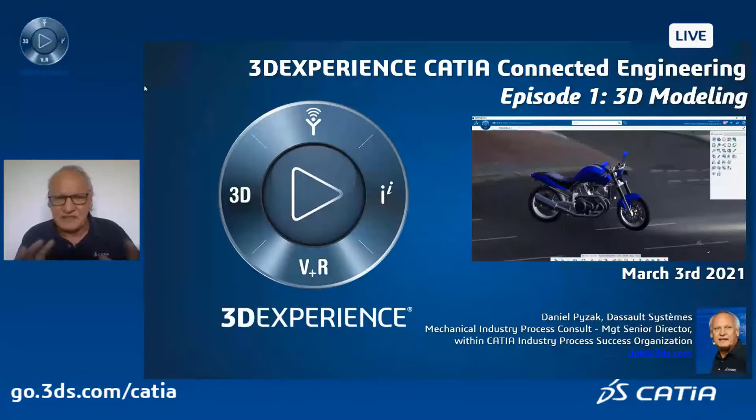And this is episode 1. We will make more episodes in the future, mainly focused on assembly modeling or some other nice capability of 3D Experience CATIA. And I hope you will enjoy that. So it lasts around 30 minutes, not more.

Let's start. So the idea is to show you how, if you were a 3D Experience CATIA user, you have to work. What are the steps to design this particular assembly? It's a braking system, braking caliper system. And at the end, how you can take into account some data that you receive from your supplier or maybe your customer, which are maybe not perfect, and how to clean and to take into account some design changes.

Okay, so it's a little bit of part design for those who are familiar with CATIA, and a little bit of generative shape design for those, again, who are familiar with CATIA. Let's start by designing this assembly.

So very first thing, I am in CATIA assembly design. So you can check here the workbench, the app I am using, and you can see that in 3D Experience CATIA, I can use very, very advanced rendering display, still with a very, very good response time, because this helps you to understand better your design context, okay?

And you can see that I will use, for this particular presentation, almost not at all the spec tree that maybe you are familiar with, what we call the specification tree, where the history of the design is shown. I will not use icons which are spread out all over my screen, because the idea is to keep most of the display for the 3D,

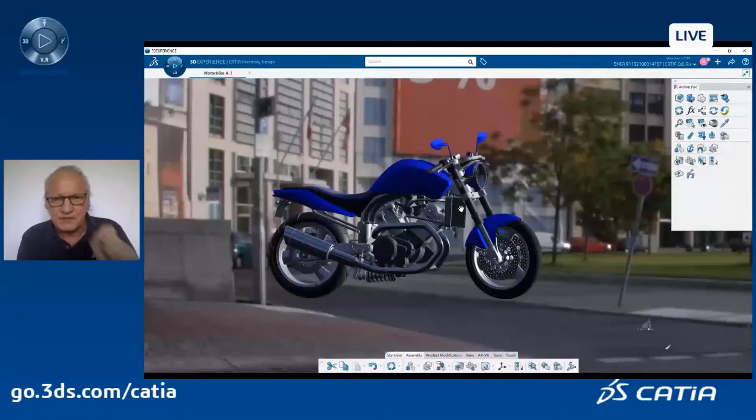And you can gather them in an action pad. They are default action pads, by the way. And you can either dock them, like what is done here. I docked them on the upper right side of my screen, or those action pads can be popped up just where my mouse is located, just by hitting the B key on the keyboard. It's not what I will use. I will use the docking capability of CATIA.

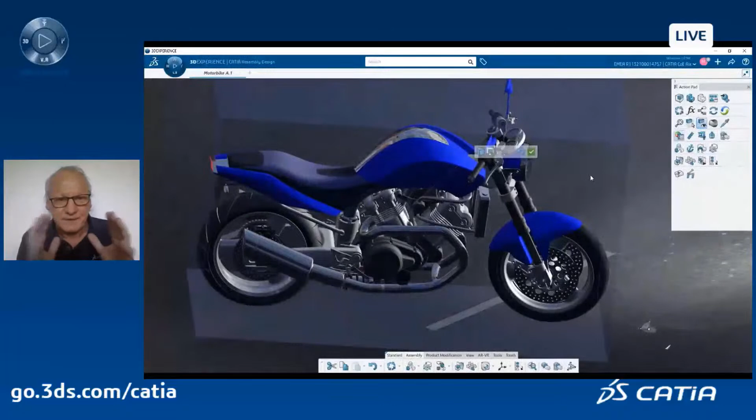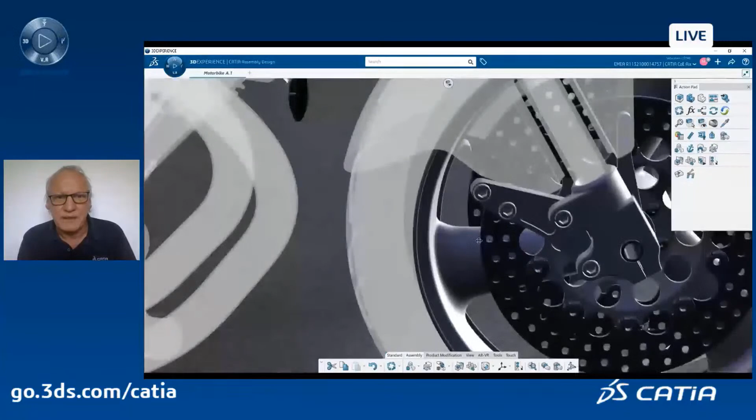Let's start. So this is my motorbike, and I want to work on this particular braking system, the brake caliper. Okay. First thing, I will select visually my context. I will define my working context, and you will see a very nice capability of 3DEXPERIENCE CATIA, which is a display of what I don't need in a ghost way. So what you see in dimmed or transparent white is in fact in ghost mode. But at least I know where I am in my full assembly.

And I can, for example, add a new view in my working environment. The view of this context can be shifted to another screen. You know, most CAD users today mainly use two screens. If you are using 3DEXPERIENCE CATIA, you use the two screens either to display, for example, the assembly and your part, or some menus, because you can also dispatch some menus to other screens. So it's very, very flexible.

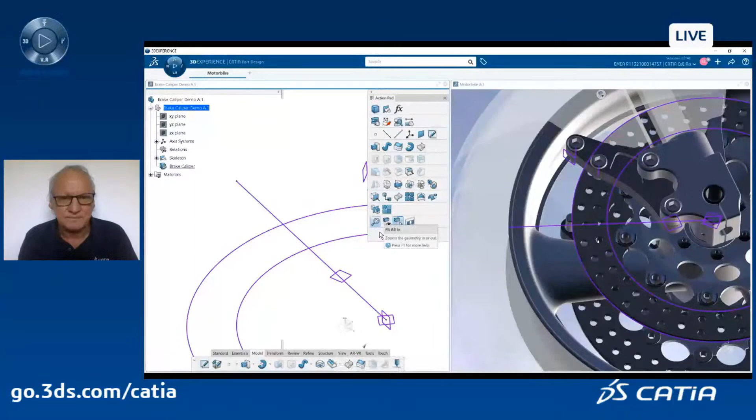So let's see what it does. So here I display my starting point. I start by defining a skeleton, which is a very traditional way of working with CATIA. And of course, I can see the skeleton at the part level, here on the left side of the screen, or at the assembly and context level on the right part of the screen. And there will be a permanent dual display of what I am designing. So let's start the design.

Maybe you did not see that, but I click on a plane, and automatically CATIA prompts me: what do you want to do with the plane? Probably you want to do a sketch. And I say yes. So I don't have to go and click on the sketch icon, which might be somewhere, maybe in my action pad, or maybe not.

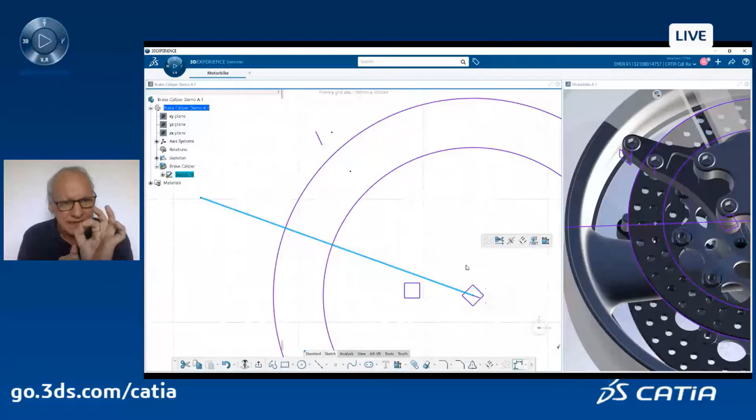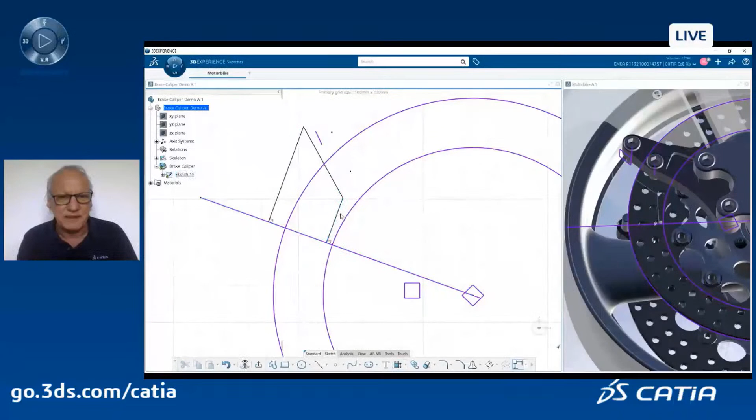You see here, sketch. Now I'm defining my sketch, and all my commands of the sketcher are also popping up in front of me, close to my mouse location and my click, proposing some commands depending on what I clicked. This is what we call the contextual immersive commands. Very nice capability. So I start my sketch. Here I can also use the commands which are in the action bar, on the lower level of the screen.

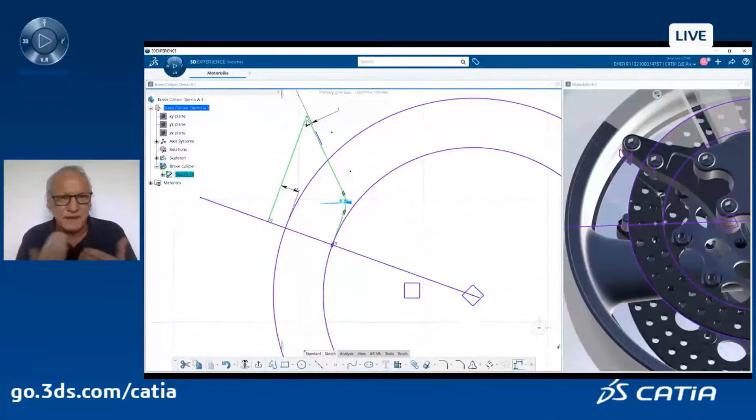This is typical design of my sketch. I define some constraints, some offsets. I define some fillets. I will also mirror this half sketch because I would like to have the complete sketch. And you see, I do not click. My mouse mileage is very limited. Here we go. I sketch. I do the mirror of this area, and now I leave the sketch. Of course, on the right side, you see exactly what I did at the sketch level.

Now I click on the sketch. The sketch was selected, so CATIA proposed to me: you have selected a sketch, maybe you want to make a pad, which makes sense. Yes, I want to make a pad. And then I just need to select the direction of the extrusion and the value, the thickness of the pad. And I directly type in the command, and CATIA creates a feature pad in the spec tree.

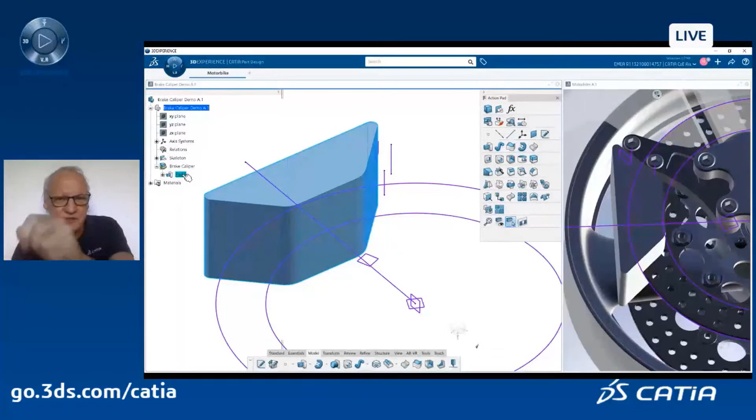You could have done exactly the same with a traditional, let's say, CATIA V5 way, where you click on the command pad, you have a dialog box popping up, you enter values, and then the feature pad is aggregated in the spec tree. But here it's much faster. Here you see the pad dialog box that you can use if you want to add more advanced details in your pad feature.

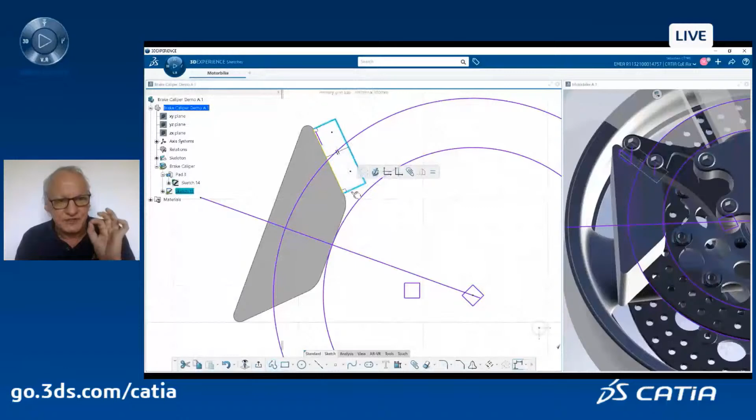Here we go. I click on this plane. I accept the sketch. Here I just project an edge of this newly created pad into the plane. And I just add some constraints on my sketch to fix it, to dimension it. And I will create, as I did earlier, another pad. This is the value of my fillet.

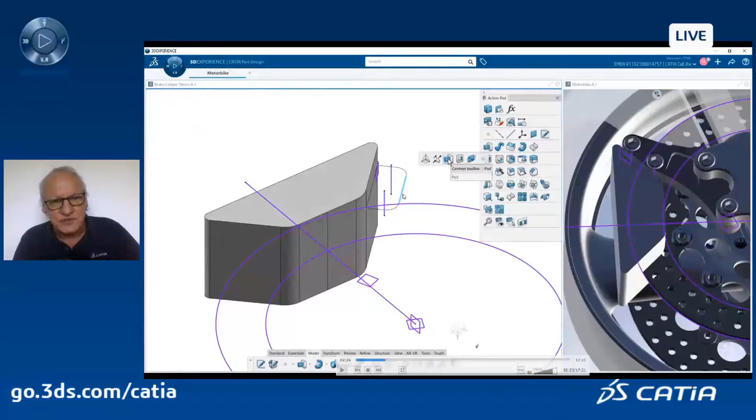Here's the sketch. As the sketch is aggregated or was constructed on a face of a solid, now I have two options. Do you want to create a pad or do you want to create a pocket? I create a pad, I select the direction and the thickness very easily. No dialog box, just everything is done directly on the graphics in 3D.

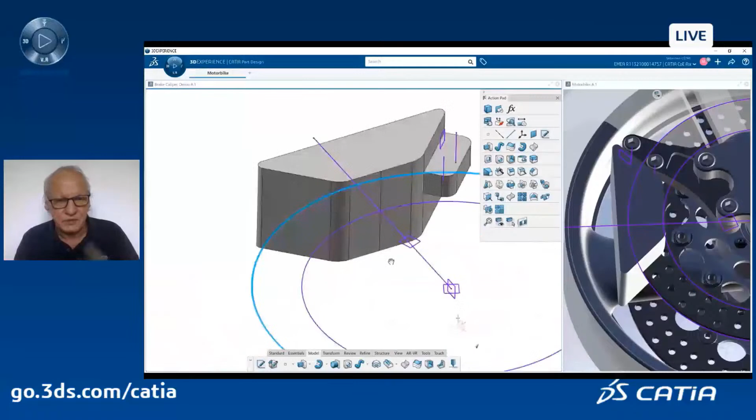I continue the design of my sketch and my solid. I am here in the sketcher of part design. I create some offsets. You see, it's very simple, very straightforward. At any time, if you need more advanced capability, you can use the advanced capability of your action pad. You can also hide the action pad.

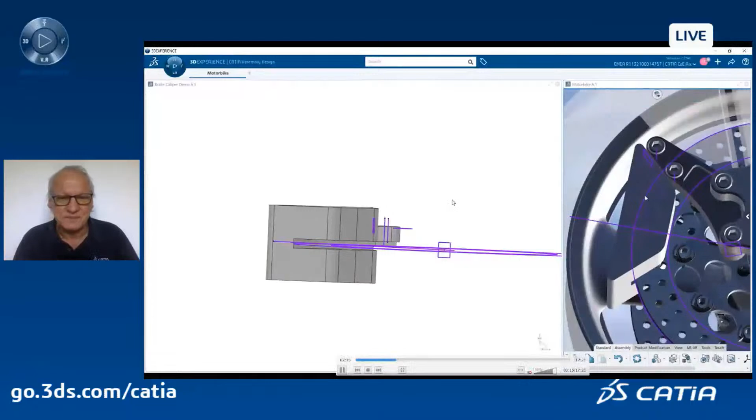Here, I just create a pocket to remove some material inside this block. And you see here on the screen why I did that, because I wanted to take into account the brake disc itself. Makes sense. So it's why the context is very important. You never design a part alone. Okay, it's always inside a context within a given assembly.

Here, by just clicking on a face and this line, I can create a hole because the inputs were the direction of the hole and the starting face. I just select regular holes. Here we go.

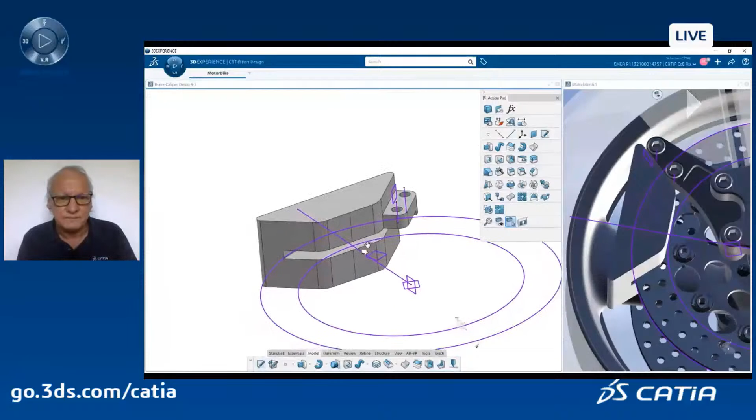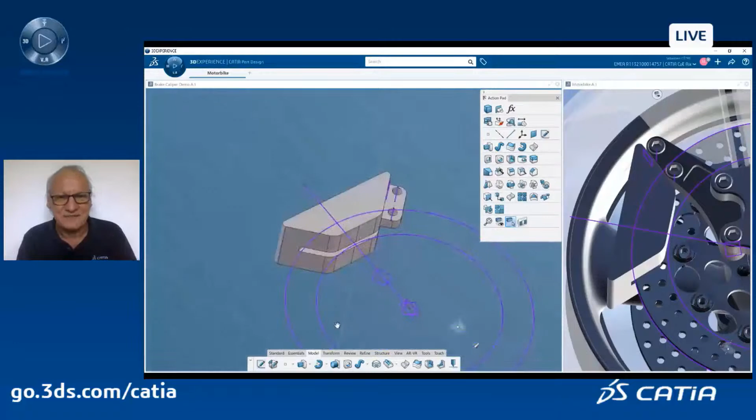Very nice capability also of 3DEXPERIENCE CATIA is that I can change at any time what we call ambience. You will see what I mean. An ambience can be, for example, a dark blue background. Traditional way of working with some CAD tools. But I can have a more fancy way. Maybe my part is designed inside a given context. You can define your own, let's say, context. And I can come back to the basic, which is white in this particular case.

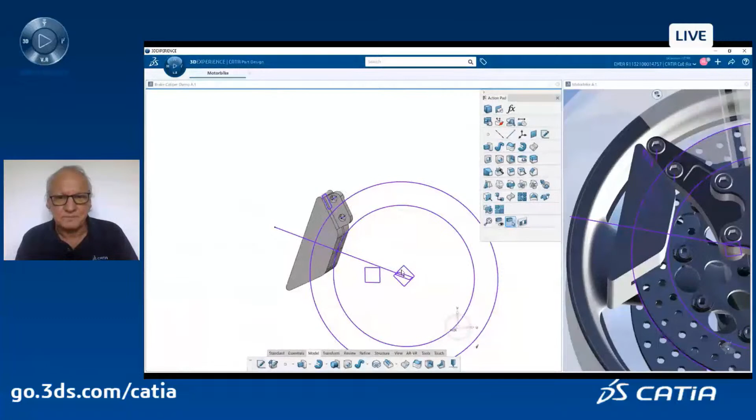Now that I'm okay with that, I will just erase my context view and just work with the, let's say, design view. Here I can at any time undock some commands and dock them where I want on the screen. It's very simple. So you see here the refine command with the chamfer fillets.

I can add as many commands where I want, and those menus can be also attached to another screen, for example, if you have two screens. And of course, if I am a little bit messy, I can come back to the predefined position of those action bars.

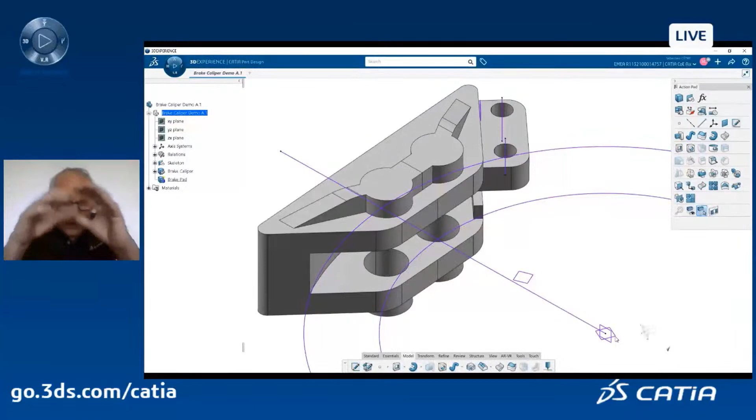Here, I create now a new body, which is my brake pad, because you will see that in this particular way of working, I will just, at a concept level, just work in part design, in one part, okay? And create multiple bodies, which will be, in fact, my future parts within a given assembly. And you will see how easy we can create from a part with bodies, an assembly with parts. Let's have a look, but let's first continue the job.

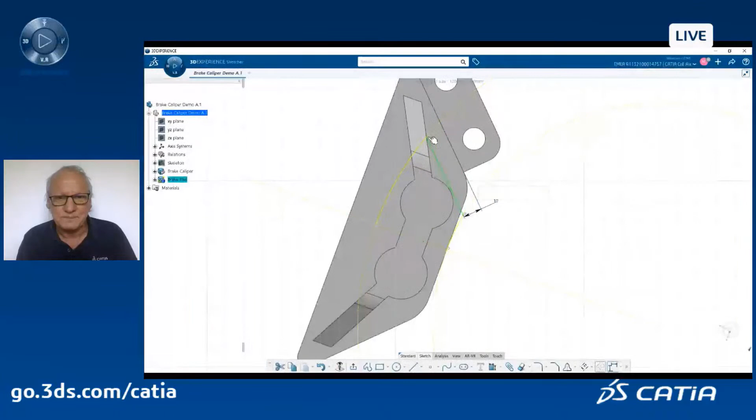Here we go. I create a sketch. I design my sketch. I guess now you are familiar with that. It's very easily done. And I will just create another, the shape of my pad. You see, as I click on my shape, I can create a pad. Here we go. And this is in my brake pad, another body.

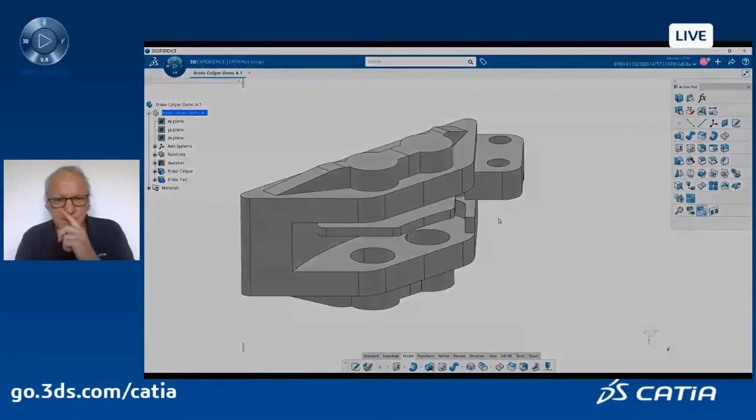So I continue the job. I create the exact brake pad after having created the pad support. So I have now three bodies, but I also created the cylinders, which will push on the pad support, and a pin which is guiding the pad support to push the brake pad. Okay, those are all my bodies.

Now I just want to start to detail or refine a little bit more the main housing of the brake caliper. But before that, I can use, very simply, wall thickness analysis. I am in part design, and here I just detect that there are some areas which are a little bit too thin. Okay, no problem.

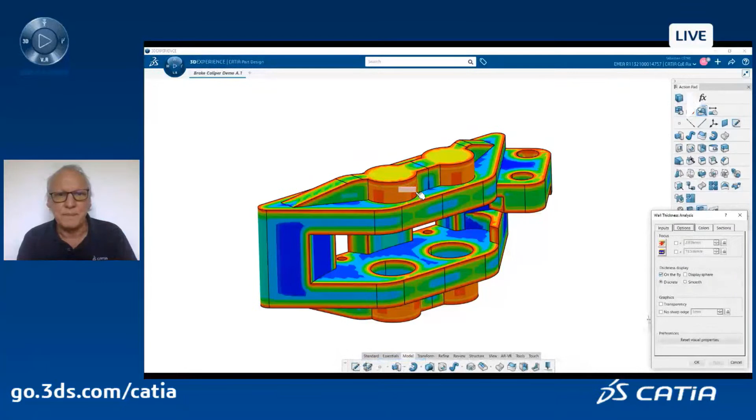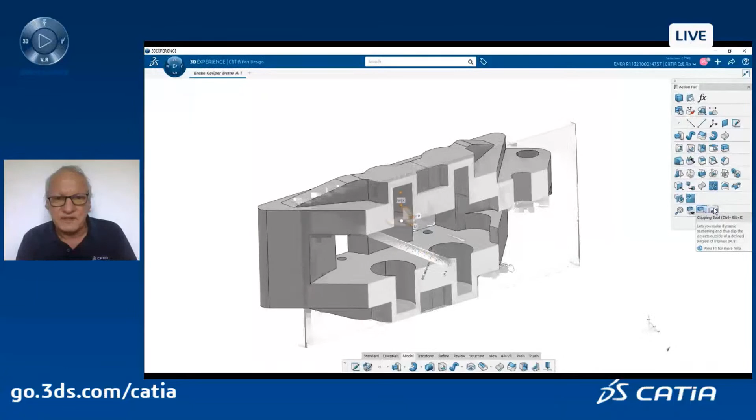I will just work and turn on a clipping. This is also very cool in 3DEXPERIENCE CATIA, the clipping tool. So you select a clipping plane, and this clipping view is permanent. Okay, you can continue to work at any time with this clipping view. Quite useful in this particular case. Of course, at any time, you can also turn off the clipping view. Here we go. Now I just zoom in.

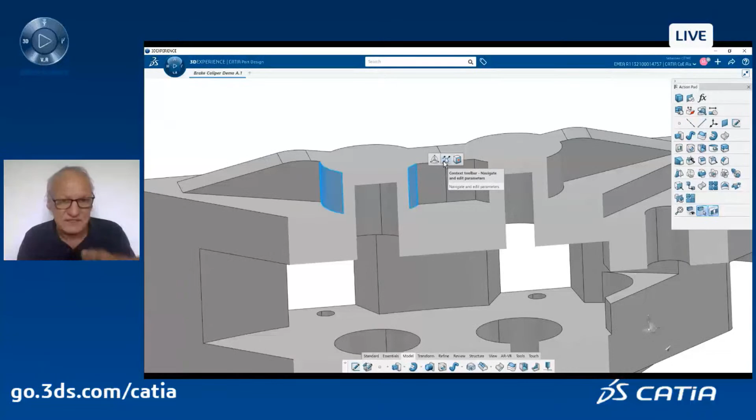Something very important, as you see here, I click on these faces and I selected this small footprints icon. And this is in fact a way to navigate with the parents and the children of this feature, or this face. And here, one of the parents is a sketch.

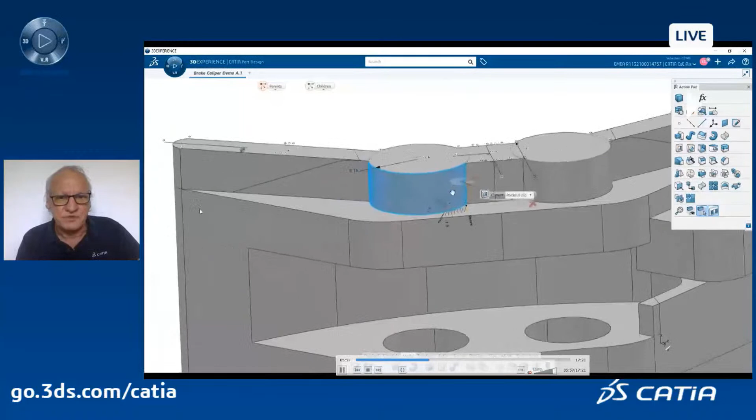So I can see that I can automatically display the sketch in 3D. I'm not forced to go to the 2D plane which was containing the sketch, and I can change, for example, this radius 14 to 16 to just make it thicker. Here we go.

I will turn off the clipping because now I'm fine, and I just double check my design by running another wall thickness analysis. Looks good to me. There is no more red area with thin area in this portion of the solid.

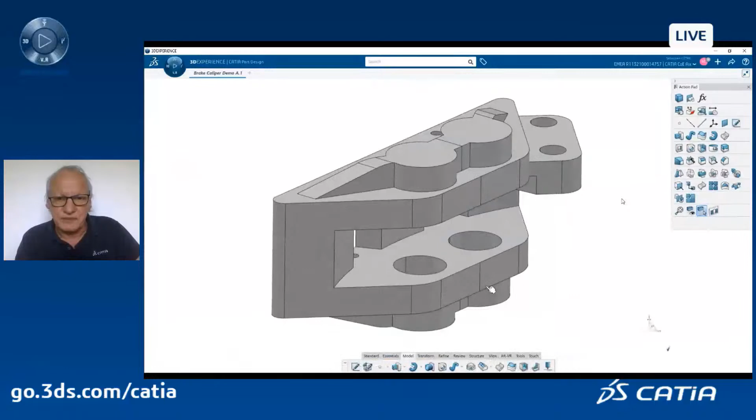Now I use another command which is called remove face. It is in my action pad because I use this quite a lot, at least as a user. So I take those faces, remove, and the solid is updated accordingly. And I will continue the job. Here we go. And I will add some holes, okay?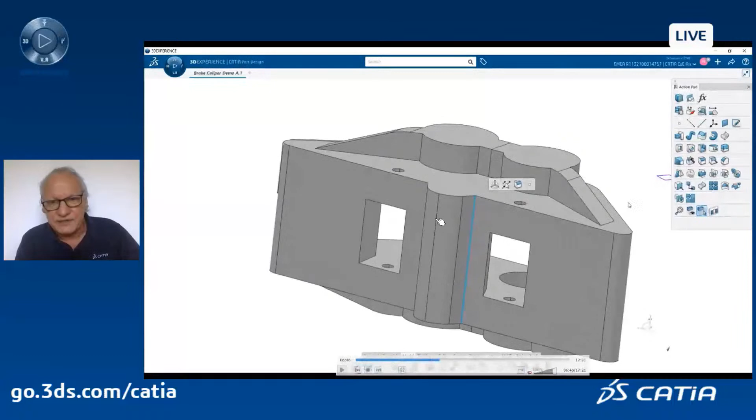So after having added a small pad, I will first start to create a fillet. You will see how easy it is to create a fillet. I just click on an edge. As I click on an edge, the fillet command is prompted. I will use the same fillet on the two edges. And you can see I have a dynamic display of the fillet, and I can change quickly the value of the fillet to the one I was looking for. No dialog box popping up, filling the screen with something that hides the 3D from my view.

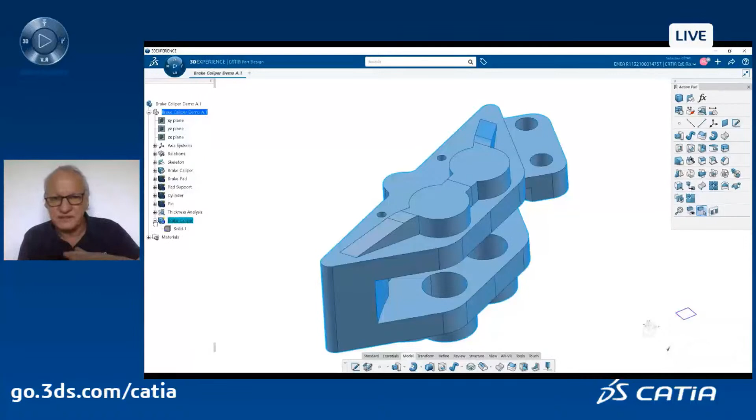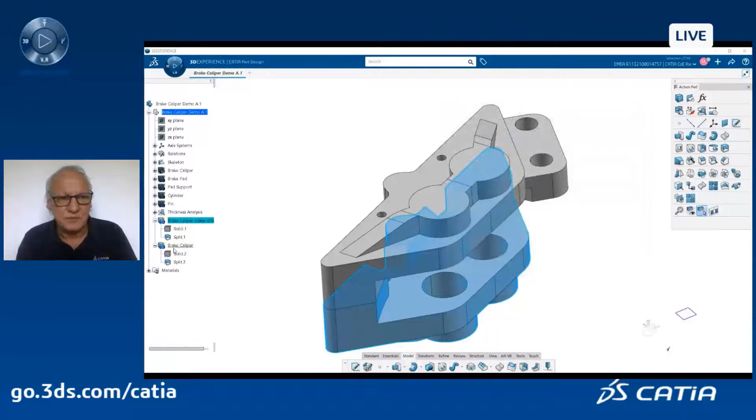Now let's go and continue the job. And what I'm doing here right now is just cutting this piece into symmetrical pieces. Okay, so it's very simple. I copy paste my body as result with link in a part. And then we'll cut out the first part and cut on the other side the other part. So I will have a lower brake caliper and an upper brake caliper, two bodies, which are symmetrical. Okay, so this is a brake caliper body, lower side, and the brake caliper upper side body. Here we go.

Looks fine to me. And in this particular situation, I will add the holes. Okay, so here I select a face, I select a point, so I will create a hole, which is an up to last hole. Okay, with a given diameter 6. Here we go. I will do the same at this particular location, at this point here. Perfect. And I will do another one here at this particular location.

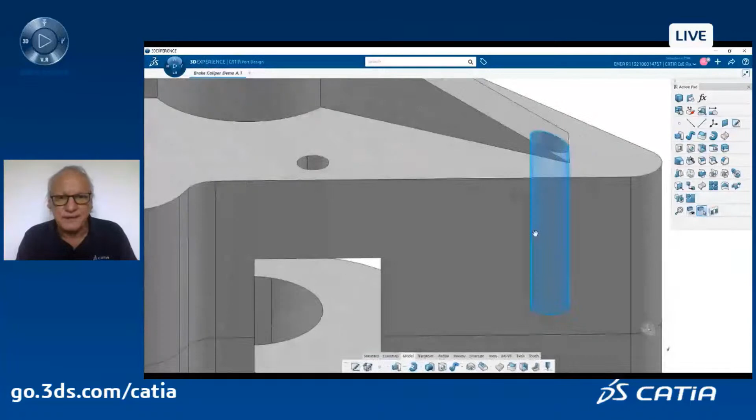I'm almost fine, but as you can see, this hole is not very good, okay? So I would like to replace this hole by a counterbore hole; it makes more sense to add a counterbore here, okay? So I just select the hole, change the parameters, use the standard I would like to use, because all those are standardized, of course, the dimension and the fillets and all this stuff. And now this feature hole is quite complex. It has a lot of different attributes. And with a simple click, you will see,

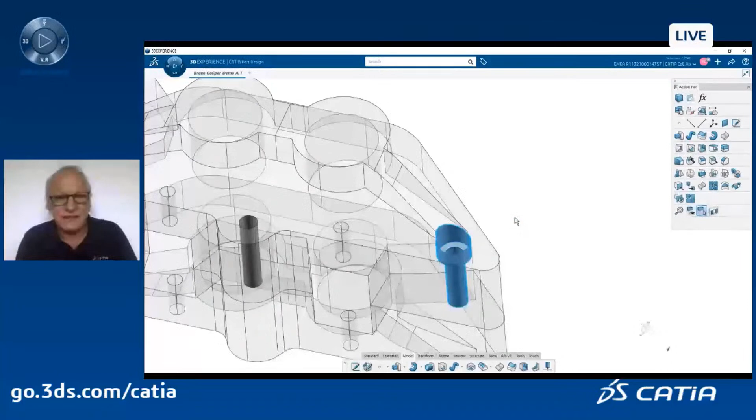I will use a semantic painter. So I click on the hole. It's a feature hole. It works also on other features of 3DEXPERIENCE CATIA Part Design. I have this semantic painter here. It's like if I was copying not the color, but the semantic, the feature parameters of this hole. And then I can drop the same parameters to the other holes in my part. Here we go. Very, very simple, very, very useful. Looks nice to me. Obviously, this part will be cast, so not milled.

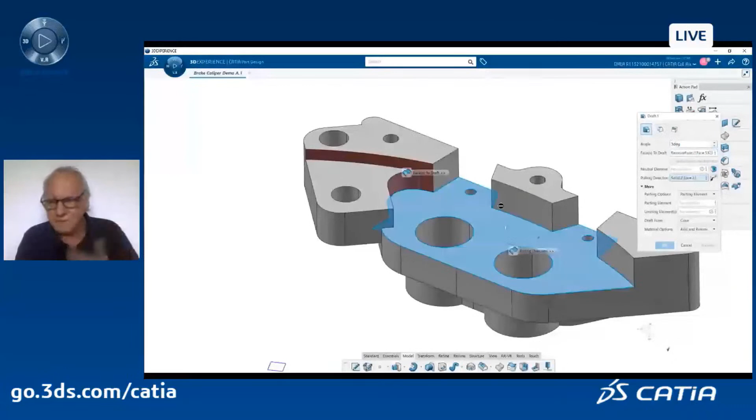So now I start to enter into the detailed design of this part, and I will just create some draft. So you can use a classical draft command if you are familiar with CATIA V5, the draft command of CATIA V5, it's very similar. So you select the face you would like to draft, you select the pulling direction, the draft direction, you select the neutral surface and an angle. Here I will put 5 degrees or 3 degrees. There we go. Let's put 3.

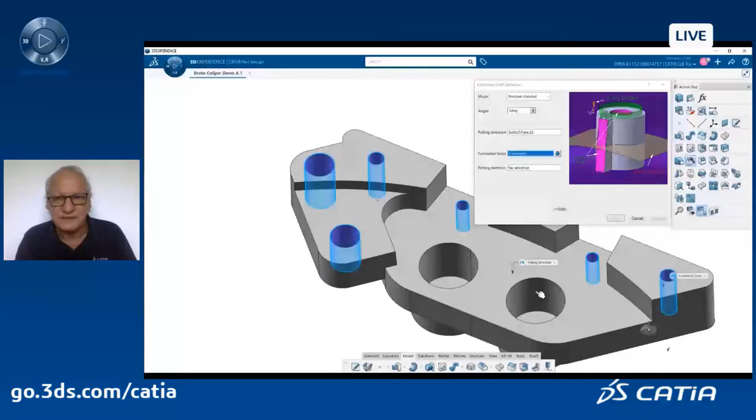This is my draft, but what is nice in 3DEXPERIENCE CATIA is that we can do exactly the same for the complete part in one shot. It's called auto draft. So you select the auto draft command, you type in the same value, the angle, the pulling direction, and also you have to select the faces you do not want to be drafted. In my particular case, all the holes. So I just select them, those will not be drafted, but every other face will be drafted, okay, in one shot, in one feature. Nice job.

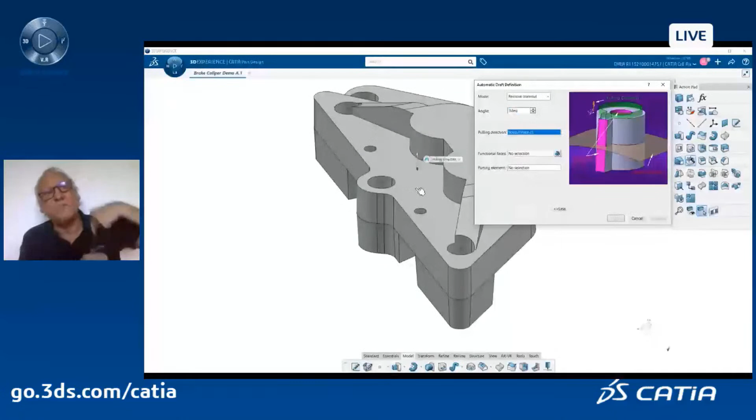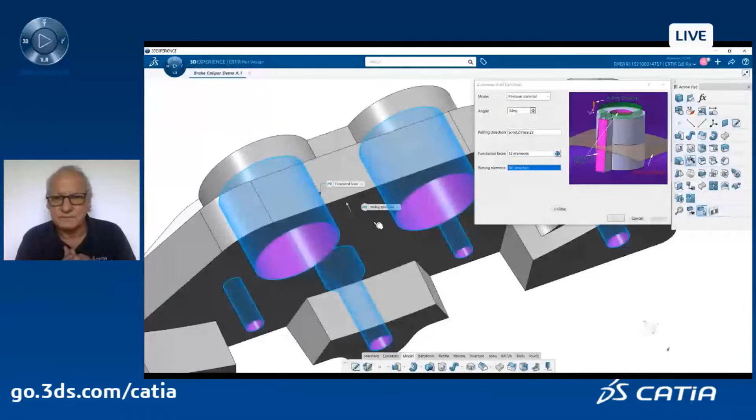I have to do the same on the other direction. So select my angle, the same angle in this case, select my pulling direction, opposite direction of course, select the faces I don't want to be drafted, and of course the parting element. Here we go. Simple clicks, one command, one feature. This is my parting element. Looks good to me. Nice job.

Okay. Just do a draft analysis to check that everything's fine. Okay, the drafts are on the right side. They have the right angle, so perfect.

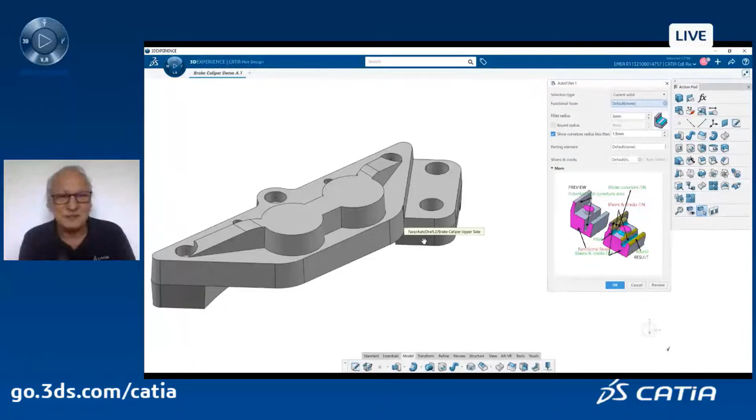And to finish the job, I will also use a magic command of CATIA, which is auto fillet. 3DEXPERIENCE CATIA auto fillet. Those fillets are not functional fillets, just manufacturing fillets. I just want to put a fillet of 1 millimeter on every single sharp edge of this design. It's exactly what this command will do. But you have to select the faces you do not want to be filleted, obviously, all the holes in my case.

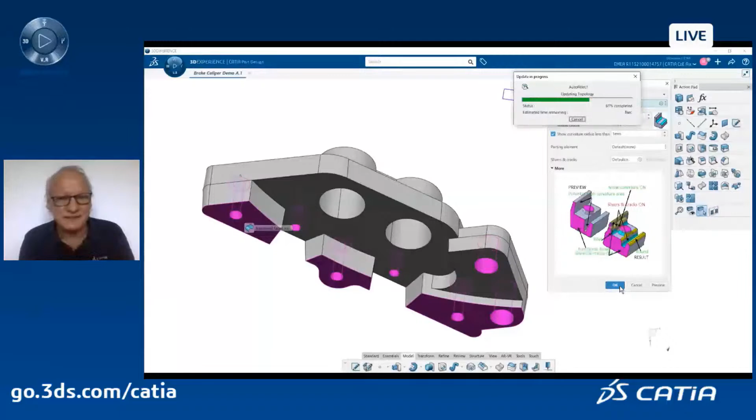Everything else will be rounded. Again, one single feature. If you have to do the same job without this command, it will probably take you much more time than me. So I put a 1 millimeter fillet everywhere. The command has not been accelerated. It's really the time it takes to do. Here we go. And every single sharp edge has been rounded. So my part is ready to be casted.

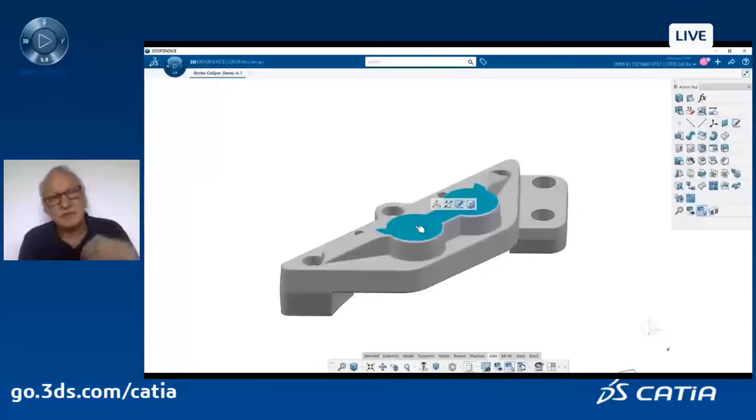Just to finish, I will add a small text, a small engraving. It can be an emboss, but here I will put an engraving. So it's also a capability which is available in 3DEXPERIENCE CATIA. You type in the text, you select the font, you select the dimension, you position and you constrain the text because this is a capability of the sketcher. So you have to position it versus, for example, an edge of a part.

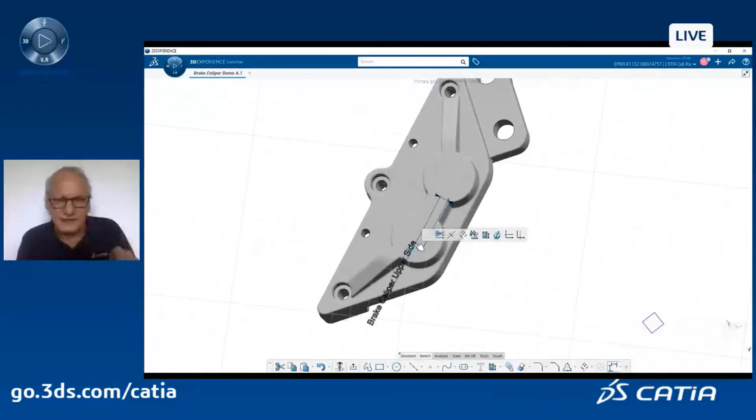There we go. And then what I will do once the text is located at the right position, I will just project it and create, in fact, a small pocket. I could have created a pad if I wanted not an engraving, but an embossing. Here we go. Perfect. Good job.

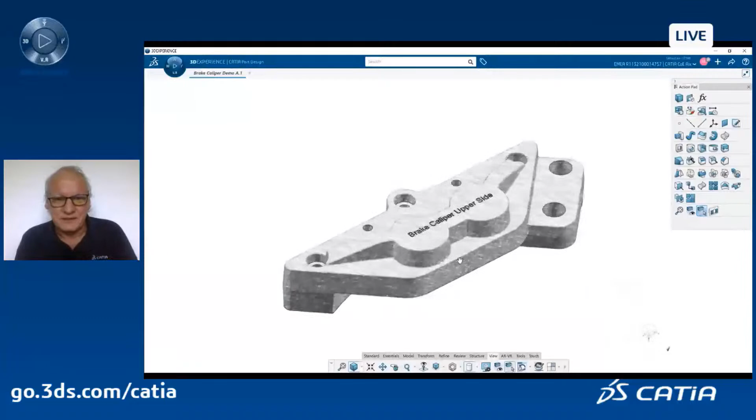If I want to, for example, share with my suppliers, my colleagues, my customer, a nice, let's say, fancy view of this product, I can again change not the ambience, but the style of my display. For example, this type of display, or why not, old-fashioned stuff, but why not to show the part and maybe use it for a marketing purpose. Let's go back to the traditional design style.

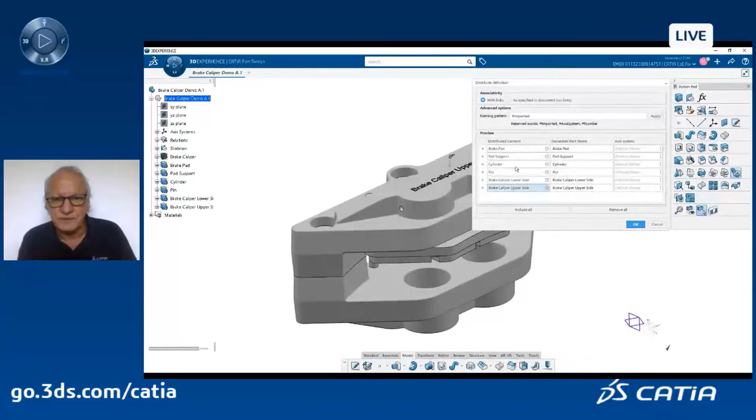So I have my various elements, my various bodies for my assembly. And then I will use the magic command of 3DEXPERIENCE CATIA called distribute. If you look at this table, you will see all the content of the spec tree. All features will be there. Of course, I don't want to distribute the skeleton or axis system or whatever. So I will just select the bodies and remove some of the features. And in one command, CATIA is creating an assembly, distributing in every single part all those bodies. It's very cool. If you have to do that traditionally, it will take a little bit more time.

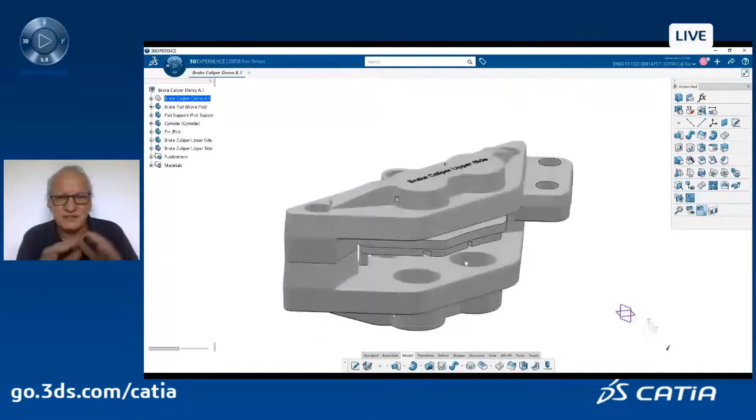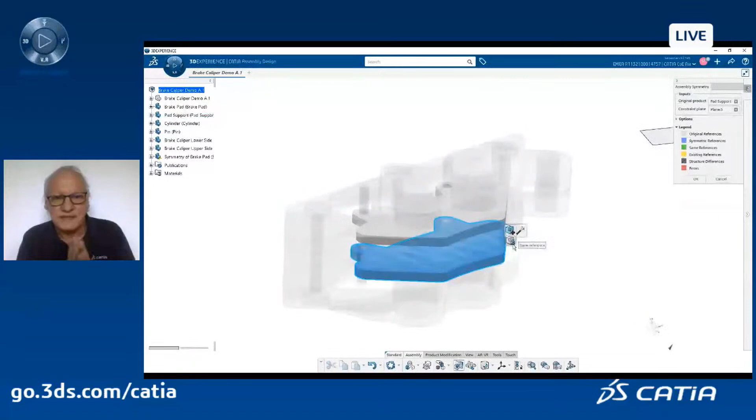So what you saw here was a very nice way of creating 3D models and assemblies by just starting from a conceptual part, because it's easy to modify. If you do a design change, it will be much easier and faster to update and so on. And then once I have my assembly, I can use, for example, a very nice capability, which is the symmetry capability of assembly design, where you can select the part which has to be mirrored. Either it's really a mirror part or the same part, but rotated and translated, because it will be the same reference in the bill of material.

And then, as you saw for the cylinders, there are two symmetries along two different planes. So very easily, you finalize the design of your assembly to make something exactly matching your request. And we will finish the design of this assembly by adding some, what we call engineering connections, to make a quick kinematic analysis of this assembly. Let's see how it works. So very easily, you can define constraints. Okay, for example, this is fixed.

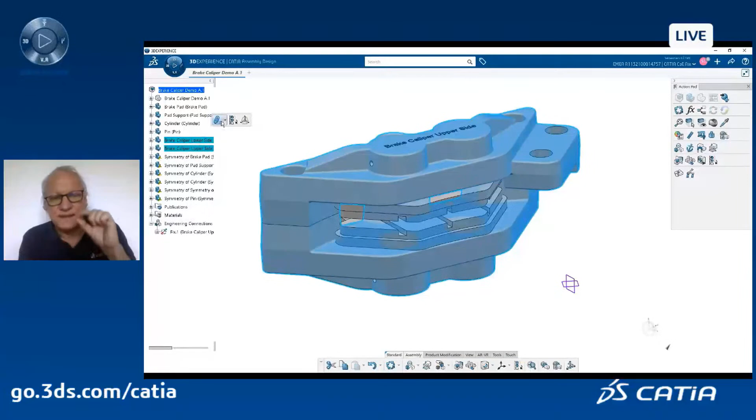This is also fixed together. Okay, so you will see what we are doing.

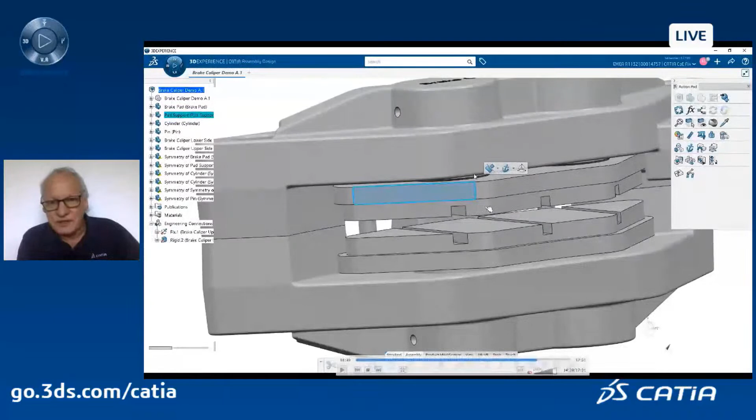The idea is that the cylinders inside this body are pushing the pad support, which is pushing the brake pad along the guide. Using the pop-up menu again, once I select a face, I can choose the type of engineering connection I want between the parts.

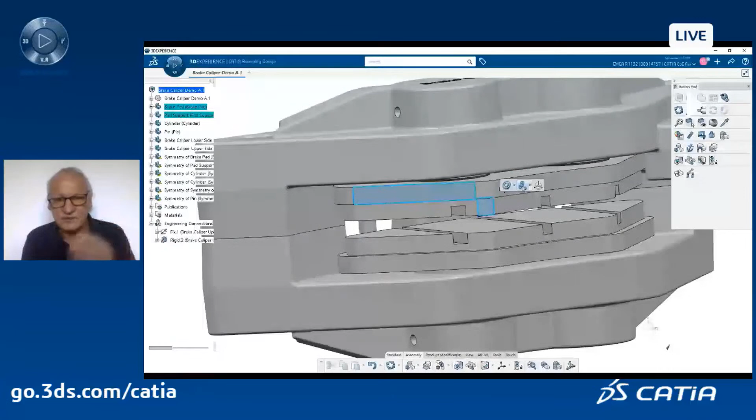Here I will again fix them together, this one and this one, because one is pushing the other, stuck to the other. Then I hide what I don't need, and define, for example, a coincidence between this cylinder and the hole where it is guided.

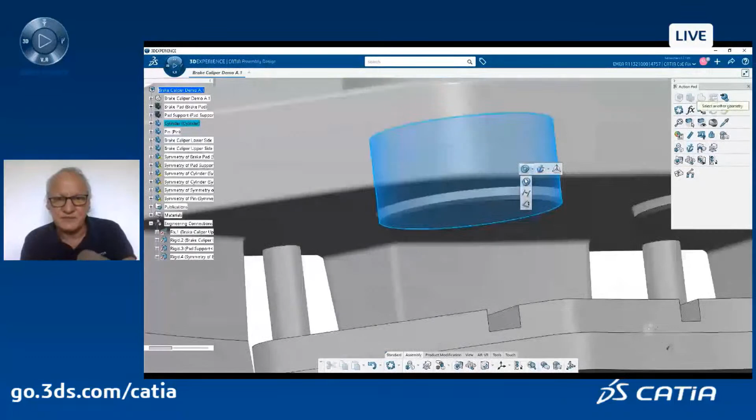So I select the face, and say coincidence with this axis, which is the axis of the hole. I do the same for the other cylinder. As you can see, as I click on a cylindrical face, it created a cylindrical connection here.

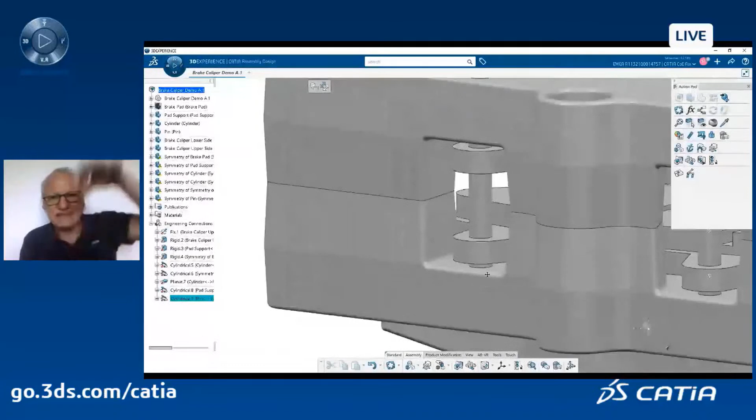I continue the job, because I now have to define the connection between the pins which are guiding the two brake pads. Those are coincidence, but it's not only coincidence I want, because otherwise it will only slide. I will add another constraint, a very logical one. You will see which one.

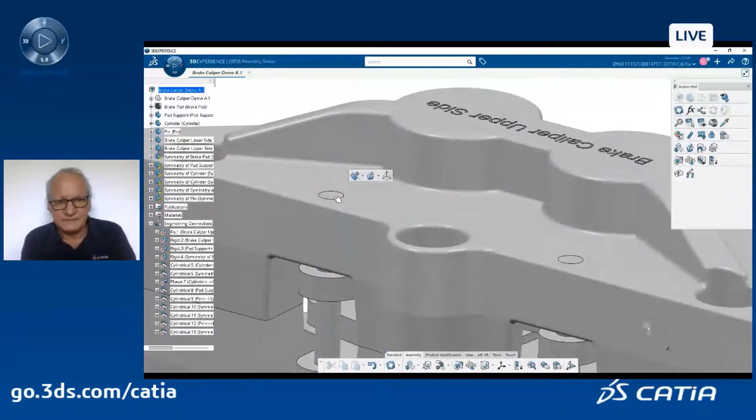Again, no big dialog box popping up, just clicking on the 3D and selecting options. What I put here is something different: I will add a contact, because the cylinders are pushing and are in contact with the pad. Once you select a contact on top of a cylindrical connection, it will enrich the cylindrical definition and convert the cylindrical plus contact into a revolute connection. This is quite smart and quite nice.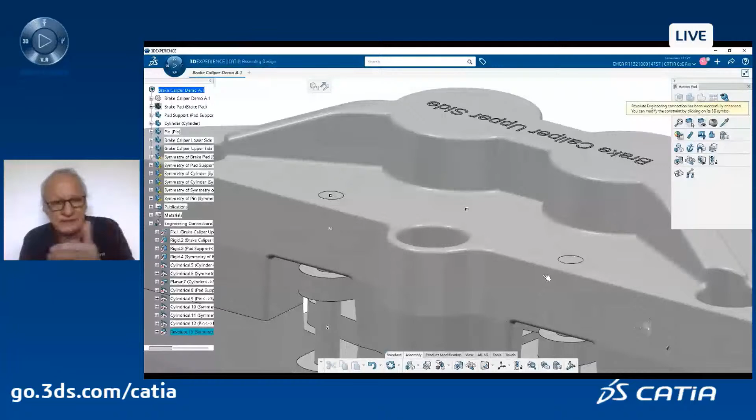So you can easily define constraints between various parts inside your assembly, and what you get for free is the kinematics. Compared to V5, where you define assembly constraints and then enter another app called Kinematic to define the kinematic joints, in 3DEXPERIENCE CATIA everything is done in one shot.

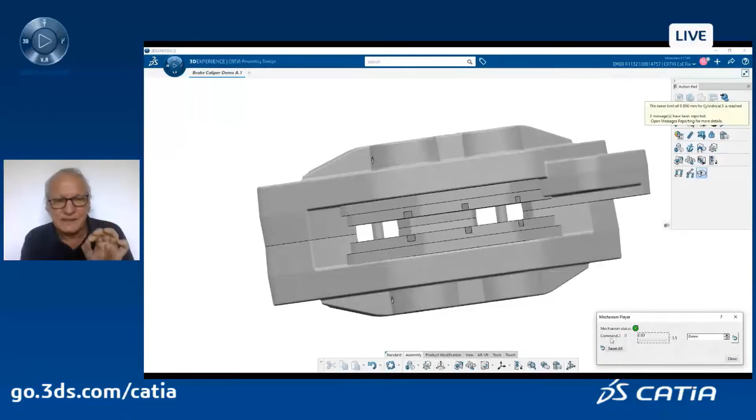Then you just have to add, for example, an input. I will select what part is moving and what is the magnitude of the motion of this part, and you can display it. So you really get kinematics for free when designing an assembly with 3DEXPERIENCE CATIA.

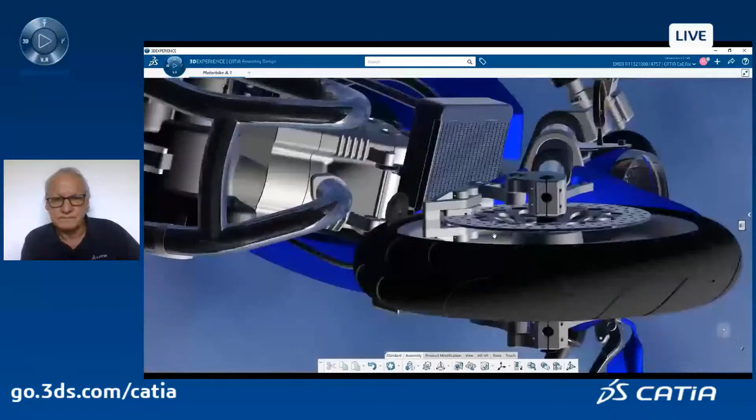And of course, we can show this assembly in motion. We can analyze the motion within the complete context of my braking system. Let's move it, just move the mechanism. Here we go.

So that's it for my first part of this presentation. You saw how easily I could design not a simple part. There are drafts, a lot of fillets, some mechanism, connections, constraints, and it took me 17 minutes, okay?

So not bad. Now, just to finish the presentation and this webinar, I will show you a little bit more advanced capability, but more regarding geometry than pure mechanical design. Let's go.

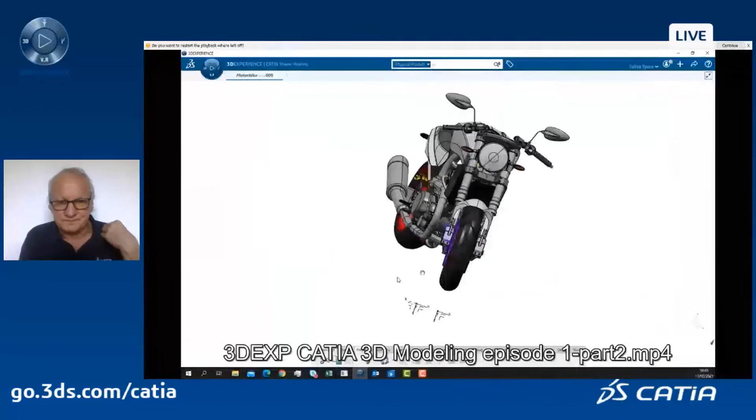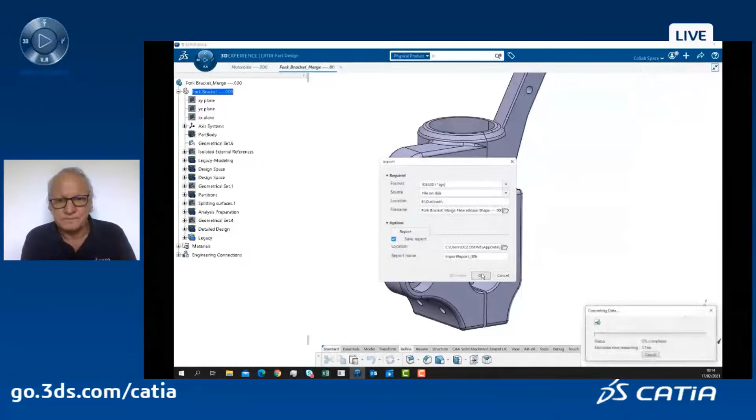Typical scenario: I receive a part from my supplier, which is this fork bracket. He sent me the part, it was this design here. And I want to convert it. Here we go. I want to check if this part is a new version of the design supplied by my customer or suppliers.

But very strangely, it's just a set of surfaces, not a solid. So maybe there was some issue during the conversion, or maybe the data was not that good at the input. So I will just try to join those set of surfaces.

You can see there is a geometrical set, for those who are familiar with CATIA. So I just join them. Okay, no problem, looks like there is no problem. And then I will create a closed surface, converting this set of joined surfaces into a solid.

Ah, there is an issue. You cannot create a solid out of that. Not a problem. So I will just now use a very nice command in 3DEXPERIENCE CATIA, which is called the local healing.

First of all, I just display where are the problems. You can see here in green there are some gaps between the surfaces, so we cannot stitch them together at a given accuracy. Again, not a problem.

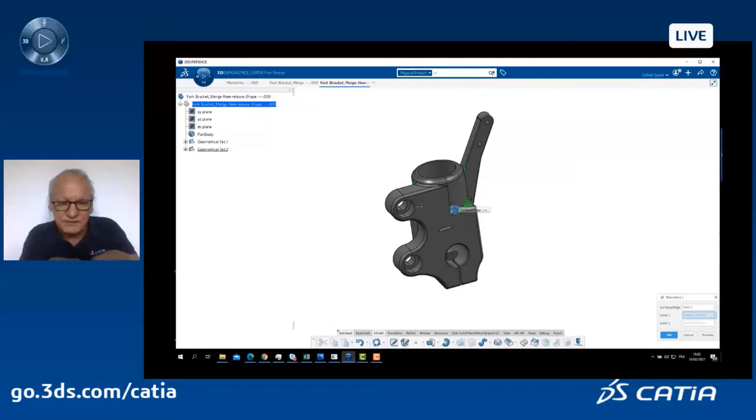Let's go and use this nice command called local healing. It's very simple: it will just heal the surfaces locally. It will not touch the rest of the surfaces, just those ones which need to be put together.

But you can see there is a plane here, and I don't want the plane to be modified. Since it's a plane, I will freeze it so it stays as a plane, and I will just move the other surface.

Now I will just add a joining distance. And if I create my closed surface now to make a solid, voila, it's working fine. That's the very first thing you can do.

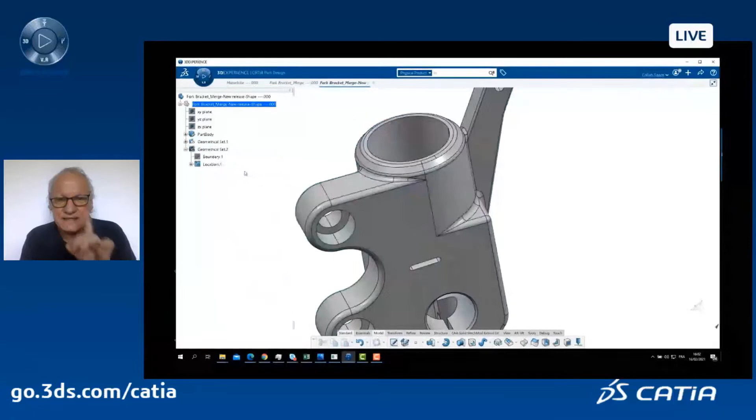The second thing you can do: I receive a new version, and I clean it because there were some issues. Now I want to compare what has been modified between my previous version, the one I showed at the beginning, and this new cleaned one. There's a nice command in 3DEXPERIENCE CATIA called compare.

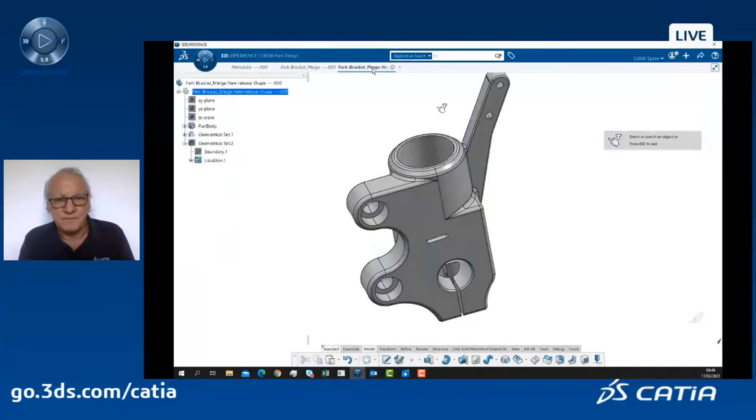So I compare the first one with the previous one, and you can see here a special window where I can display the differences between the first part and the new version. I can highlight if there are differences and where they are. You can see there is a small pocket which has been added in one version versus the other.

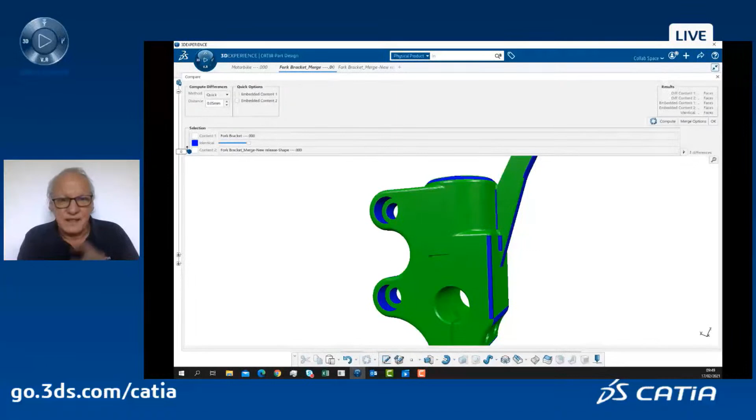Now what's very nice is that I can automatically extract from the new version what needs to be added to the previous one. I extract just what is necessary and keep the rest of the geometry. That's what we call the compute - extracting just the faces which are different, the big one and the small pocket here.

I select these options, and now you'll see in the spec tree that I have three geometrical sets: what is identical between the two versions, what is specific to the first version, and what is specific to the new version. I will just hide what is not necessary and keep what has changed.

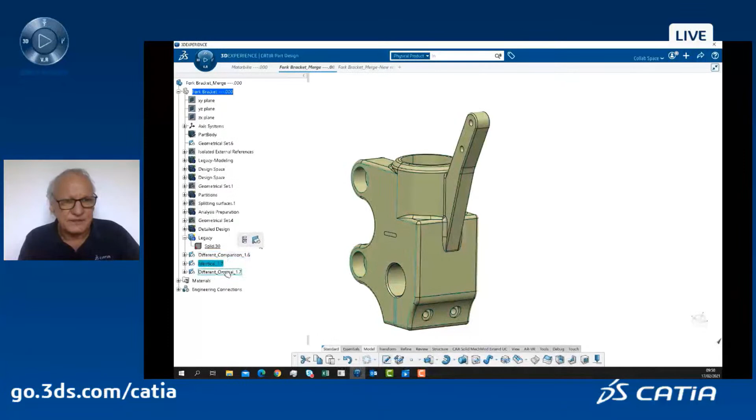You see here in yellow what I will do: I'll just sew this new surface, or set of surfaces - which is a planar surface with the oblong - to the previous solid. This is a sew command, and automatically we create the update of the solid.

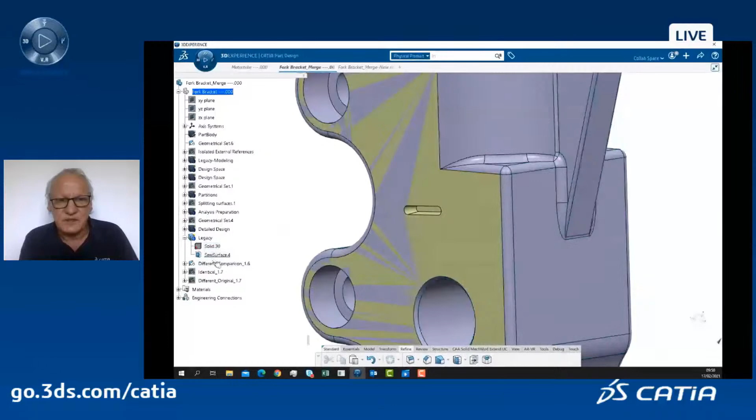Very nice capability. It helps a lot because sometimes the differences are not so obvious between one version of the model and the second version. And of course, I can work and check my part in my context.

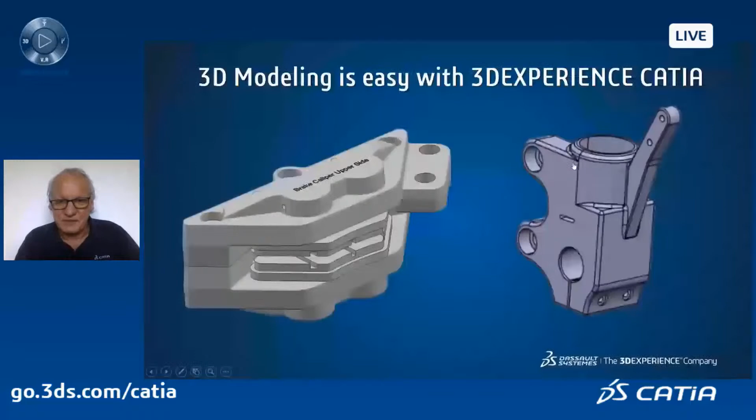So that's it for me. The conclusion: first, I hope you understood that 3DEXPERIENCE CATIA has a very intuitive user interface. You pick in 3D and you are guided. It's very effective, very few mouse clicks, very small mouse mileage - you don't go from one side of the screen to the other.

On top of that, you can even customize more than what's proposed by default if you have very particular commands that you use a lot. The display is very fast and high quality, and you have very advanced modeling capabilities, which is one of the richnesses of CATIA, and continues to be a richness of 3DEXPERIENCE CATIA.

So what are the benefits for you? Casual users find it easy to use - they don't spend a lot of time just figuring out what to do in front of the screen. Expert users are very productive because they don't spend too much time opening and closing dialog boxes; they just focus on the 3D, click on entities, and CATIA pops up with the right commands. For existing CATIA V5 users, it's very simple to learn and quick to master.

And we measured that the productivity when designing solids or surfaces can vary between 20 to 50%. So it's a great advantage to move to 3DEXPERIENCE CATIA, wherever you are starting from - don't wait. Thank you very much for your attention.